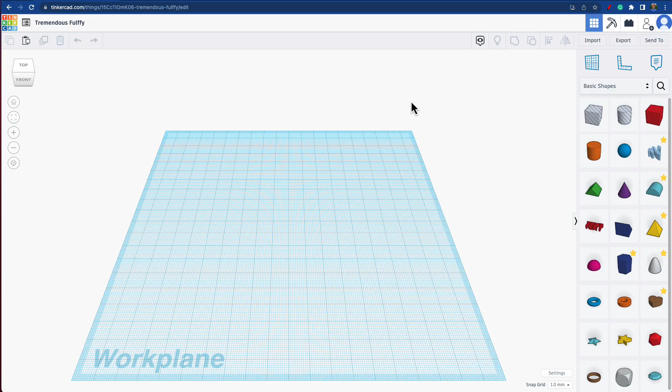As you probably realized in CAD, there are multiple ways to do something. For the frame, I could make each wall separately with a box, or I could do a box with a hole in the middle. That's what I'm going to do because it takes fewer parts and it's a little faster.

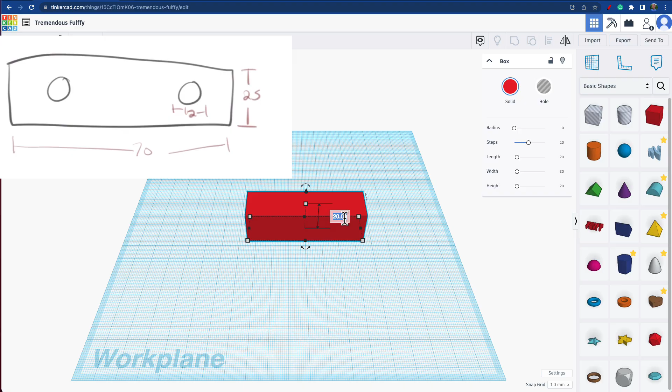So let's start with the block I'm going to create first. My dimensions for my sketch were 70 by 25 in height, by 30 in width. Now let's make a hole in the middle.

First, let's raise this hole so it's tall enough. The width of the whole thing is 70, right? But I want the thickness to be 6 millimeters on each side.

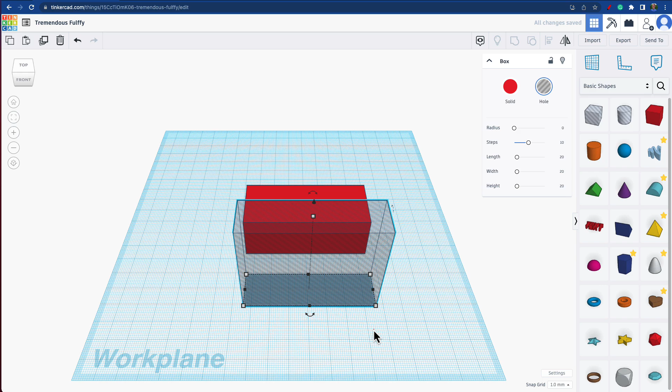So I have to take 6 millimeters off this side and 6 millimeters off that side, which gives you a total of 12 millimeters. So 70 minus 12 is 58.

The distance here was 30, right? But I have to take 12 off. So 30 minus 12 is 18.

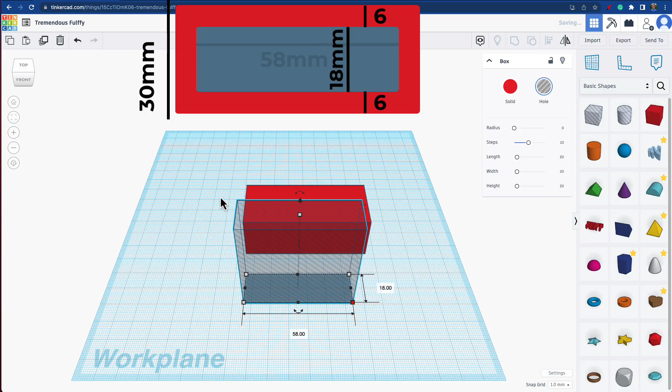Now let's align these up and see how it looks. Alright, that looks okay, but it's a little thick to me, to be honest.

And maybe actually the base is a little narrow. So I'm going to change some dimensions here as I go for my sketch. That's perfectly normal and totally okay.

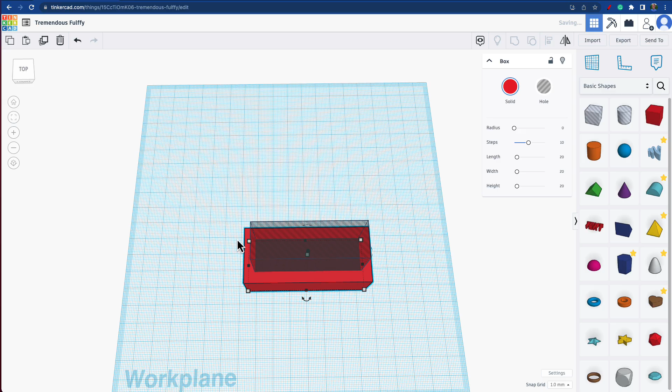I'm going to ungroup this. And instead of a thickness of 30, I'm going to change that to 35. And instead of a thickness of 6, I'm going to choose 5.

If you remember, the full distance is 70, and I have to minus 10 from that, 5 on each side, so that gets me 60.

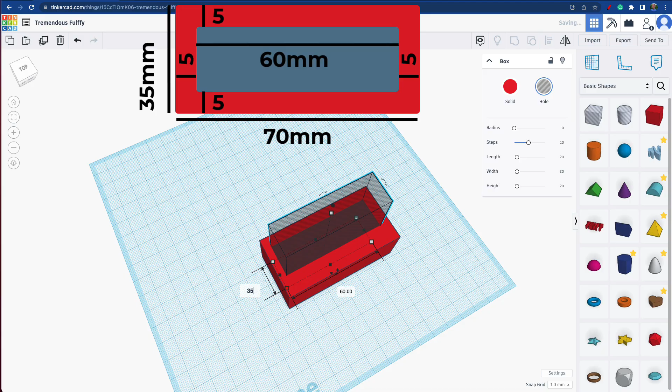And here, the full distance is now 35, and I have to minus 10 for that, which is 25. This also makes the math much easier.

So let's align that, and that will affect some of my other dimensions on other parts, but I have to take note of that. Group this up.

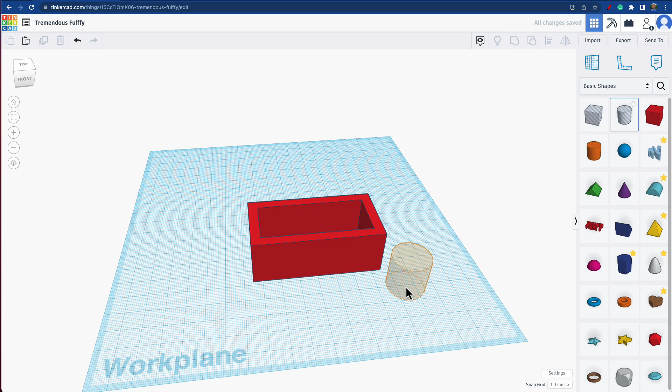All right, this is looking good. So for the holes for the axles, I'm going to drag in a cylinder. I'm going to size it up to be 12 by 12 because that's what we decided in our sketch. Then I'm going to rotate it down to 90 degrees.

Then I'm going to click on this black dot if I just want to stretch it in one dimension. These black dots allow you to stretch it in one dimension very easily, so it goes all the way through to both sides.

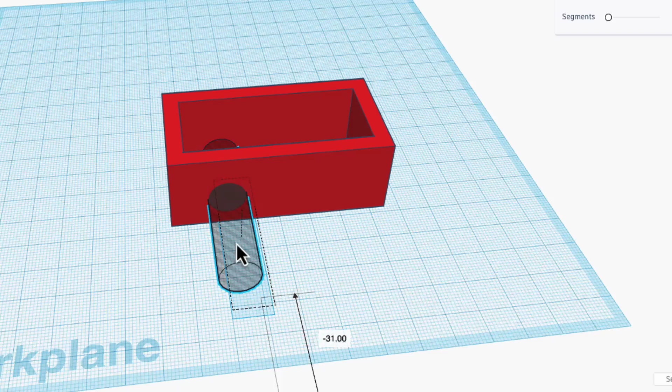Looks good. But I want to know how high this is. So I'm going to hit D to drop it down, and then click the black arrow to move it up 4 millimeters. Looks pretty good.

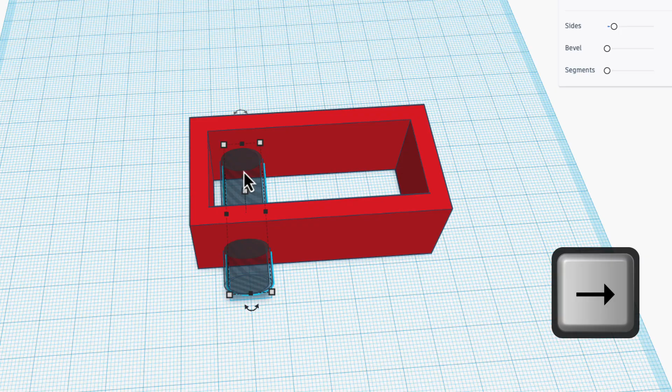Now let's duplicate that, and I'm going to use the right arrow to move it over without moving it up and down. Perfect.

Now we want to know how far in this is. And there are multiple ways to do this. One way would be to select both objects.

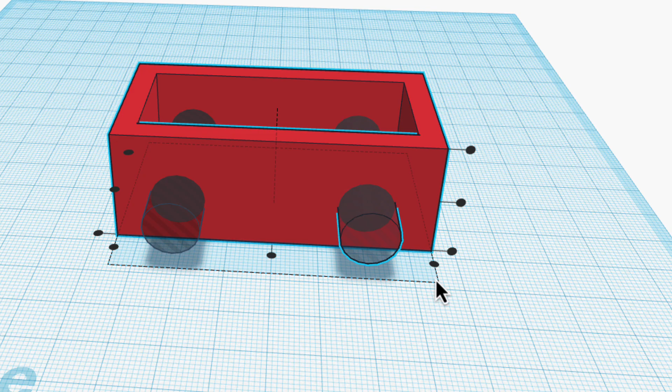Hit align, click on the red frame, and line it up on the side.

Then, when I move it, I can move it in, and I know how far I moved it in. I'm going to move it in 10 millimeters and 0 this way. So that's one way to do it.

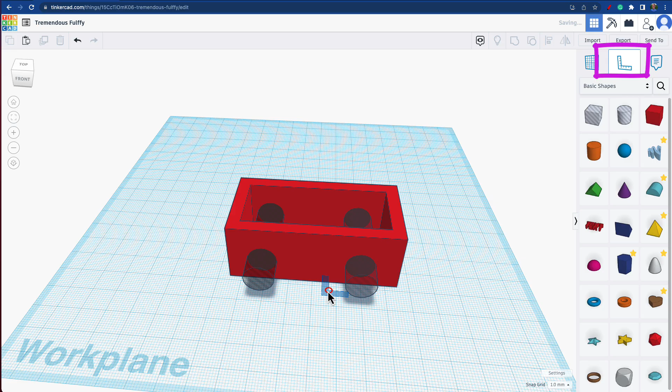Another way is to use the ruler. If I click on this ruler and put this dot down here, I'm going to zoom in to see if I lined it up perfectly. I didn't line it up perfectly with the corner.

And it won't let me. Why? It keeps jumping to the next box. Well, these boxes are millimeters, and the bigger boxes are centimeters. And why is it jumping? That's this snap grid setting I haven't told you about.

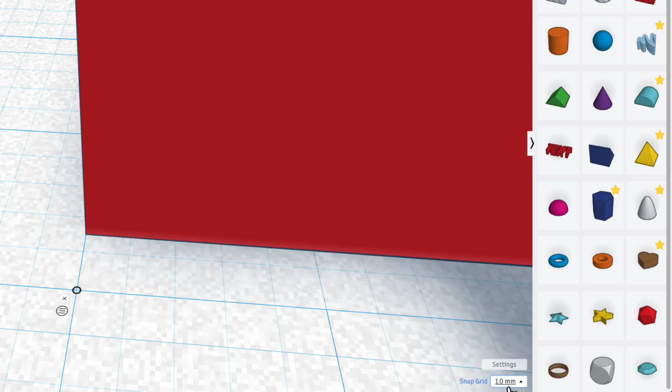Right now, snap grid is 1 millimeter, which means it will jump 1 millimeter. So we're going to change it to 0.1 millimeters. Now it's moving 0.1 millimeters, which should get me right there.

I can even turn it off and it would be even more accurate. I'm going to change it back to 1 millimeter after doing that because it's easier for the rest.

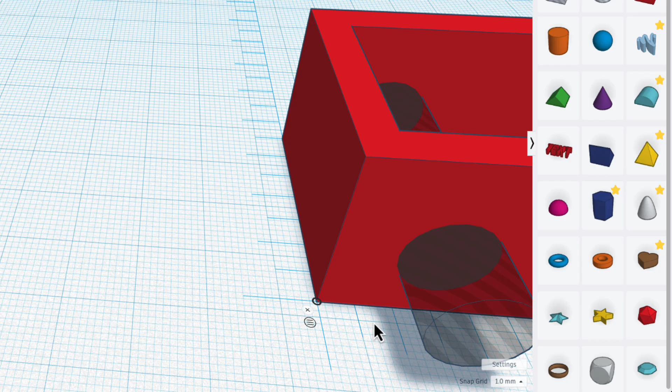All right, now that I have my ruler, if I click on this hole, some new numbers come up. You'll see in blue, it still gives me the measurement of the hole. But in green, it shows me the distance from this point.

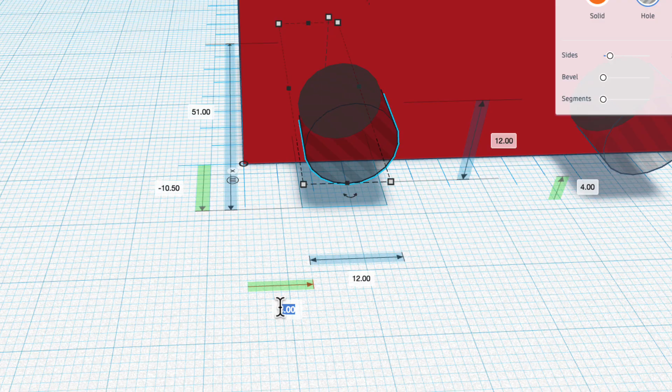So this way, it's negative 10.5, and this way, it's 8. I can actually click on this number and type in 10 if I want it 10 in. If I wanted it less, like 6 in, I could do 6.

Originally, I did say 10, but I think maybe 8, now that I look at it. Let's group it.

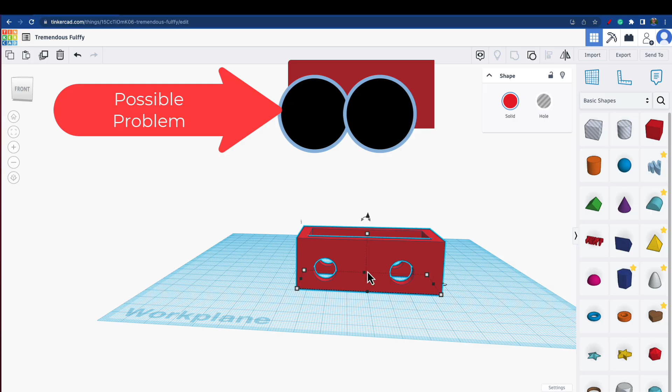All right, it grouped together, so it looks pretty good. I am worried about how close these holes are to the middle. Once we create the wheels, we'll get to see if that works. But let's keep it for now.

I might have to stretch out the frame later on, but that's all right. Let's keep it the way it is for now.

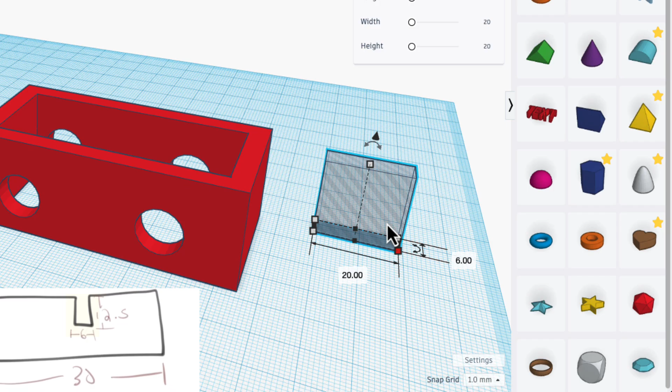Now let's worry about the back here and creating that slot. To do that, we create a hole. From our measurements, we were going to create a 6mm thick launcher, so that's going to go like that. And we were going to do half the height.

So the height we chose was 25. What is half of 25? Well, half of 20 is 10.

And half of 5 is 2.5. So that's 12.5. You'll notice I haven't worried about this distance because it doesn't really matter.

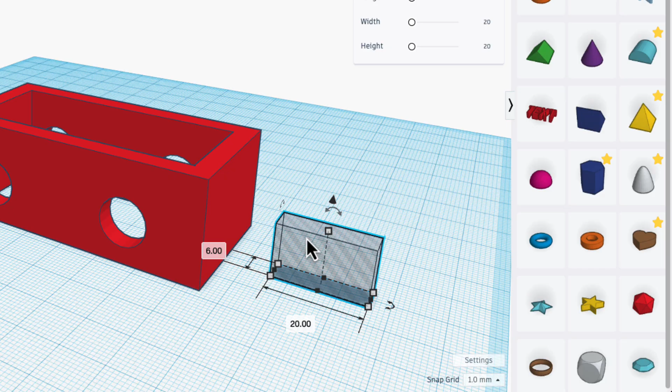All right, so let's put this here and we want to raise it up. How much do we want to raise it up? Well, we want to raise it up 12.5, half.

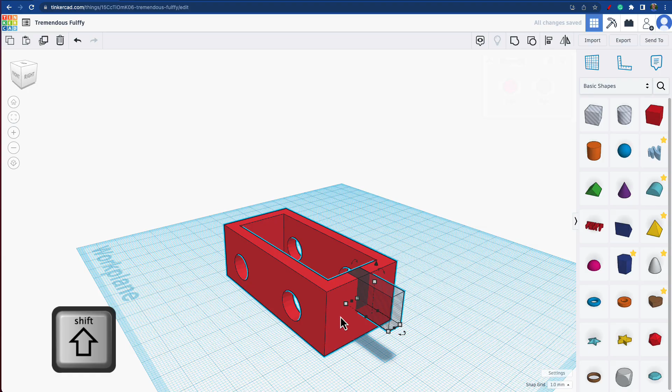I could have done this with the align tool as well. Hold shift, click align because I want to center it. Pretty good. Hold shift, select both objects, group it.

And there we go. So I have my basic frame done. When you do your frame, you can add some embellishments, some designs, maybe some curves in the front. You want it to look different. That's great. Next, we're going to work on the axles.